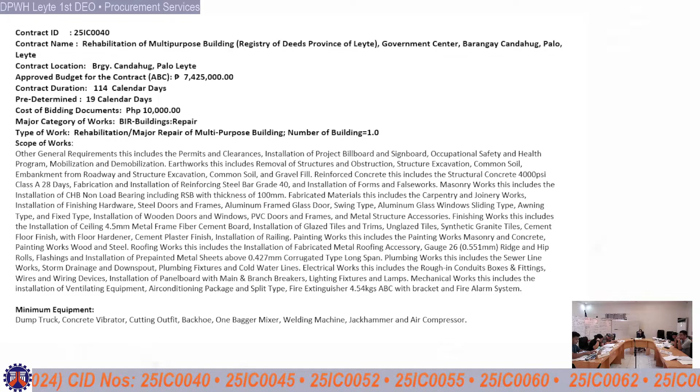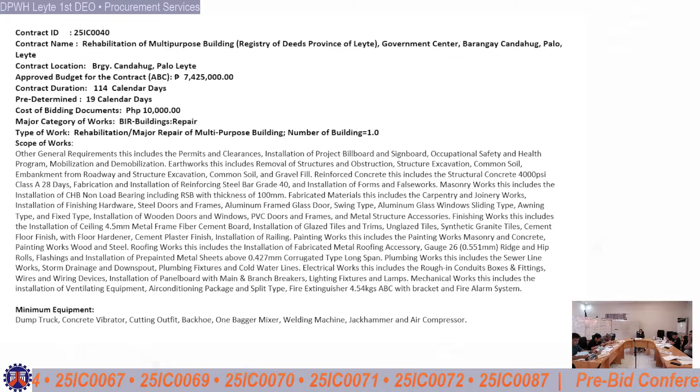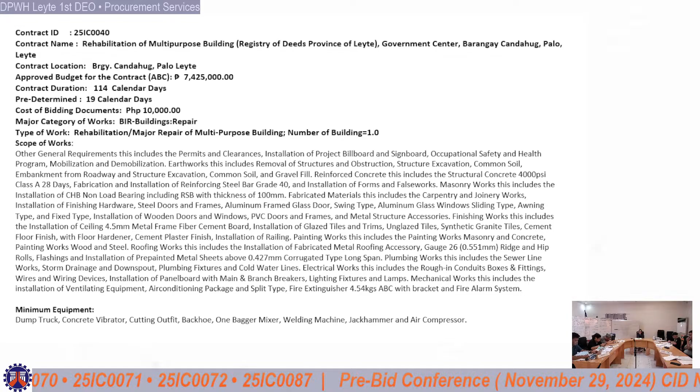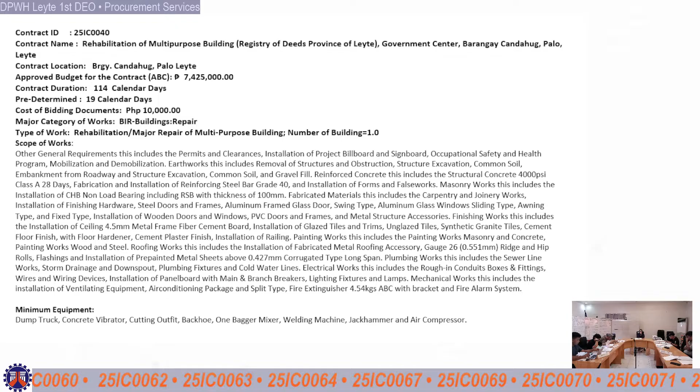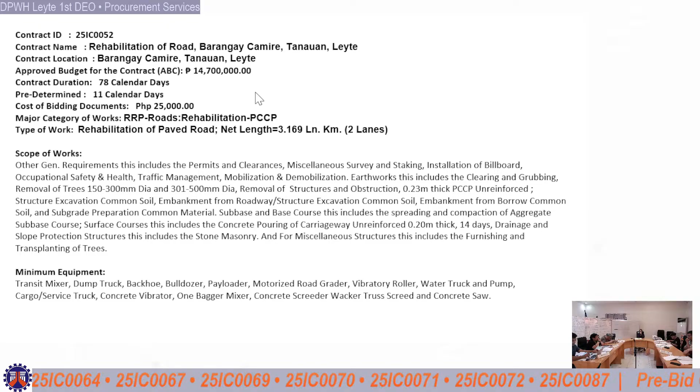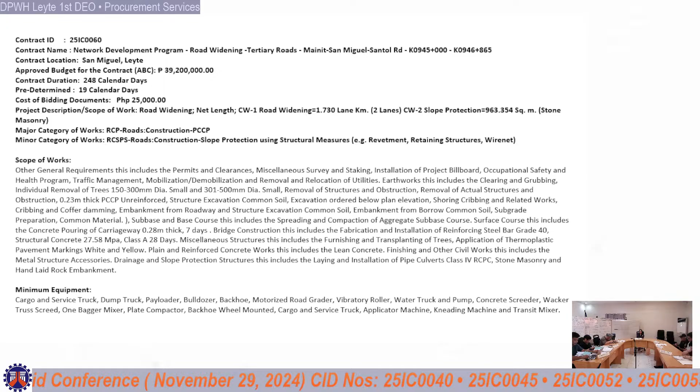And for earthworks, this includes the clearing and grubbing, individual removal of trees 150 to 300 mm diameter, and 301 to 500 mm diameter small. Removal of structures and obstruction, removal of actual structures and obstruction, 0.23 meters thickness, PCCP unreinforced. Structure excavation, common soil, excavation ordered below plan elevation, shoring, cribbing and related works.

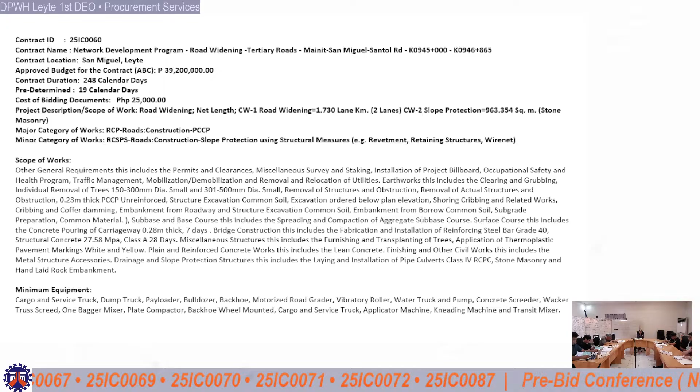Embankment from roadway and structure excavation, common soil, embankment from borrow, common soil, sub-grade preparation, common material. For sub-base and base course, this includes the spreading and compaction of aggregate sub-base course. For the surface course, this includes the concrete pouring of carriageway with 0.28 meters thickness, 7 days.

And for bridge construction, this includes the fabrication and installation of reinforcing steel bar grade 40, structural concrete 27.58 MPa, class A, 28 days. And for the miscellaneous structures, this includes the furnishing and transplanting of trees, application of thermoplastic pavement markings of white and yellow, plain and reinforced concrete works.

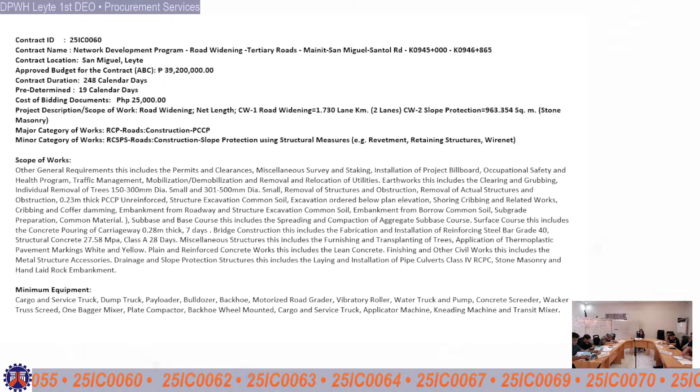This includes the lean concrete. And for the finishing and other civil works, this includes the metal structure accessories. And for the drainage and slope protection structures, this includes the laying and installation of pipe culverts, class 4 RCPC, stone masonry, and hand laid rock embankment.

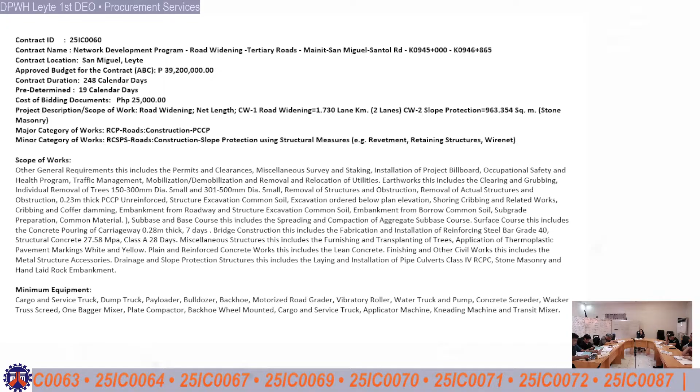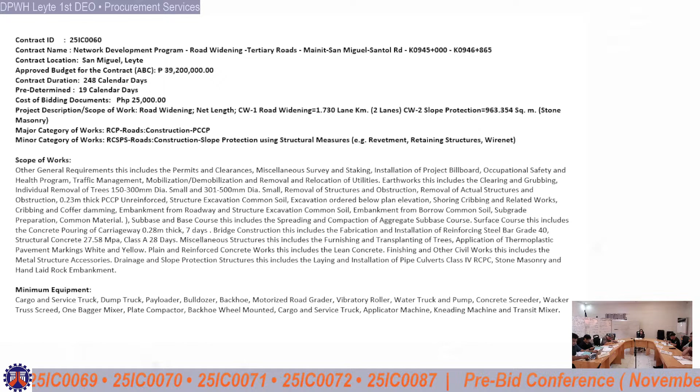And for the minimum equipment: cargo and service truck, dump truck, payloader, bulldozer, backhoe, motorized road grader, vibratory roller, water truck and pump, concrete screeder, wacker truss screed, one bagger mixer, plate compactor, backhoe wheel mounted, cargo and service truck, applicator machine, kneading machine, and transit mixer.

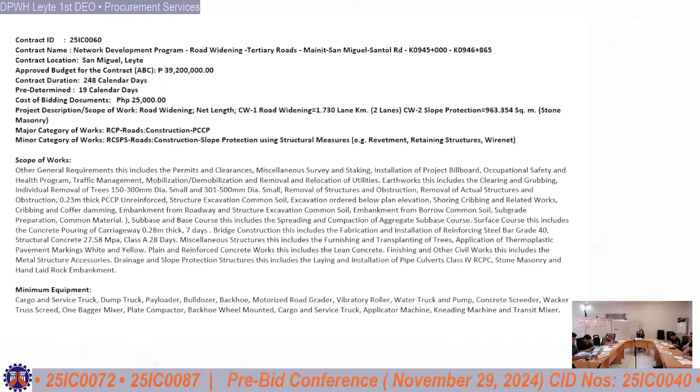For the next project is 25IC0062. The contract name is the Network Development Program, Road Widening, Tertiary Roads, Tanauan-Dagami Road along station units, K0928 plus 930 to K0929 plus 012. The contract location is in Tanauan, Leyte.

And the approved budget for the contract is 6,860,000 pesos. The contract duration is 100 calendar days and 7 predetermined calendar days. The cost of bidding documents is 10,000 pesos.

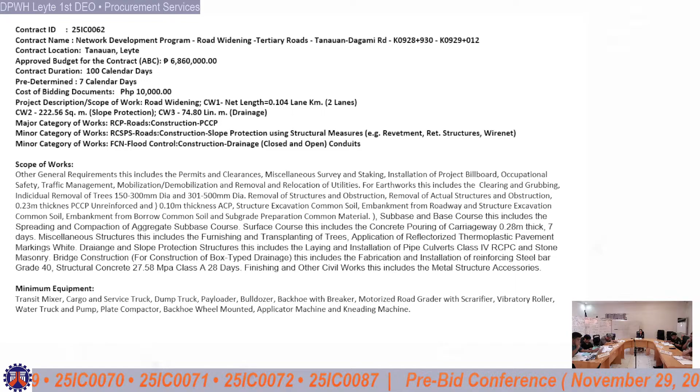The type of works, this has also three civil works. For civil works 1, this is road widening with a total length of 0.104 lane kilometer, 2 lanes. For the second civil works, slope protection, this has a total area of 222.56 square meter. And for the drainage, civil works 3, this has a total length of 74.80 linear meters.

For the major categories of works, RCP roads construction PCCP for civil works 1. For civil works 2, this is in minor category of works, RCSPS, roads construction slope protection using structural measures, for example, revetment, retaining structures, and wire net. And for the third category of works is FCN, flood control, construction, drainage, closed and open conduits.

The scope of works, other general requirements, this includes the permits and clearances, miscellaneous survey and staking, installation of project billboard, occupational safety and health program, traffic management, mobilization and demobilization, removal and relocation of utilities.

For earthworks, it includes the clearing and grubbing, individual removal of trees 150 to 300 mm diameter and 301 to 500 mm diameter. Removal of structures and obstruction, removal of actual structures and obstruction with 0.23 meters thickness, PCCP unreinforced, and also 0.10 meters thickness, ACP.

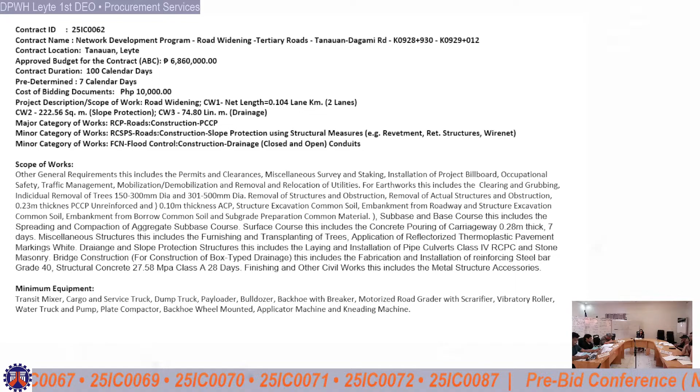For the surface course, this includes the pouring of carriageway with 0.28 meters thickness, 7 days. For miscellaneous structures, this includes the furnishing and transplanting of trees, and application of reflectorized thermoplastic pavement markings.

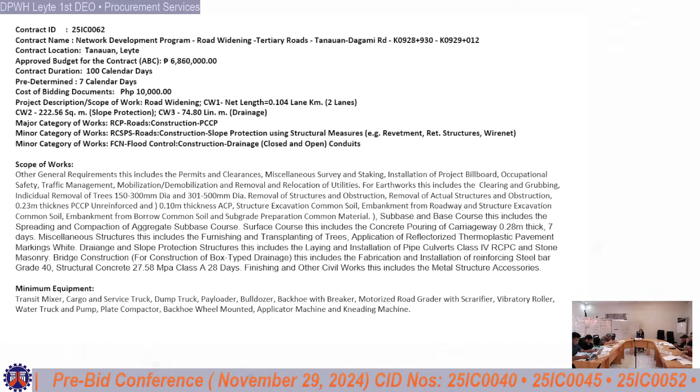For drainage and slope protection structures, this includes the laying and installation of pipe culverts, class 4 RCPC, and stone masonry. For the bridge construction, for construction of box type drainage, this includes the fabrication and installation of reinforcing steel bar, grade 40, structural concrete 27.58 megapascal class A 28 days.

For finishing and other civil works, this includes the metal structure accessories. For the minimum equipment: transit mixer, cargo and service truck, dump truck, payloader, bulldozer, backhoe breaker, motorized road grader with scarifier, vibratory roller, water truck and pump, plate compactor, backhoe mounted, applicator machine, and kneading machine.

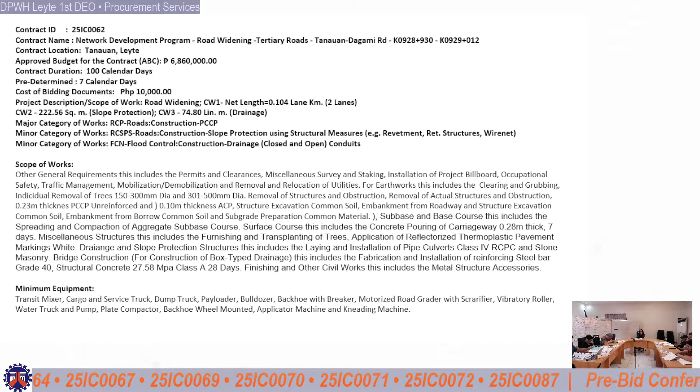For the next project, it's going to be IC 0063. The contract name is Network Development Program, Road Widening, Tertiary Roads, Tigbao to Pulak, Santa Fe Road, along station limits, K0910 plus 920 to K0911 plus 136, and K0911 plus 168 to K0912 plus 367. The contract location is in Santa Fe, Leyte.

The approved budget for the contract is 49 million pesos. The contract duration is 219 calendar days and 22 predetermined calendar days. The cost of bidding documents is 25,000 pesos, and the type of work has 2 civil works.

For civil works 1, it is road widening with a total length of 2.830 lane kilometer, 2 lanes. For civil works 2, for slope protection with a total area of 1,387.736 square meter, stone masonry.

For the major categories of works: RCP, roads construction, PCCP. For the minor category of works: RCSPS, roads construction, slope protection, using structural measures, revetment, retaining structures, and wire net. For the scope of works, for other general requirements, this includes the permits and clearances, miscellaneous survey and staking, installation of project billboard, occupational safety and health program, traffic management, mobilization and demobilization, removal and relocation of utilities.

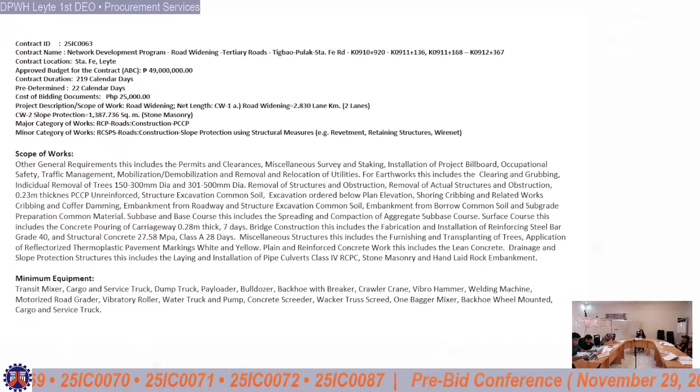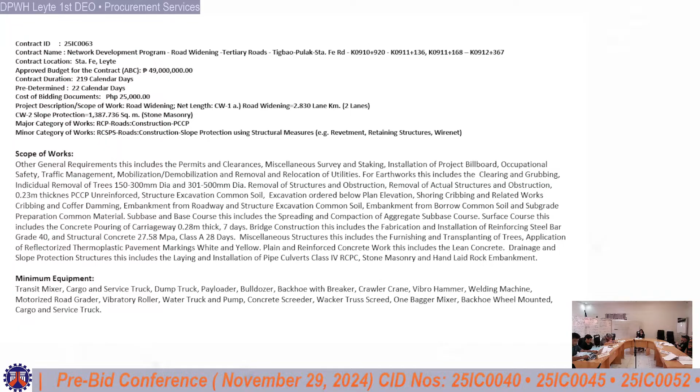For the minimum equipment: transit mixer, cargo and service truck, dump truck, payloader, bulldozer, backhoe with breaker, crawler crane, vibro hammer, welding machine, motorized road grader, vibratory roller, water truck and pump, concrete screeder, wacker truss screed, one bagger mixer, backhoe wheel mounted, cargo and service truck.

For the next project is 25 IC 0064, construction of one unit, two-story multi-purpose building, senior citizen center, and other related works, government center, Palo, Leyte.

The approved budget for the contract is 6,930,000 pesos. The contract duration is 104 calendar days and 26 predetermined calendar days. The cost of bidding documents is 10,000 pesos. The type of work is construction of multipurpose building.

The major category of works is BIPW2 PLC, buildings construction without piles, low-rise concrete frame, 1 to 5 stories. For the scope of works, for the other general requirements, this includes the permits and clearances, installation of project billboard and signboard, occupational safety and health program, mobilization and demobilization.

For the earthworks, this includes the clearing and grubbing, structure excavation, common soil, embankment from roadway and structure excavation, common soil, embankment from borrow, common soil, and gravel fill.

For the reinforced concrete, this includes the structural concrete 4,000 PSI class A 28 days, lean concrete, fabrication and installation of reinforcing steel bar grade 40, and installation of form works and post works.

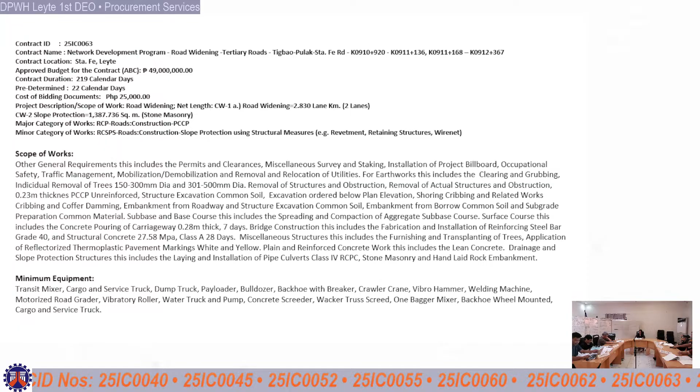For the roofing works, this includes the installation of fabricated metal roofing accessory gauge 26 with 0.551 mm, flashings, and the installation of prepainted metal sheets above 0.427 mm corrugated type long span.

For metal structure accessories, turnbuckle, bolts and rods, sag rods, cross bracing, steel plate, structural steel trusses, and purlins.

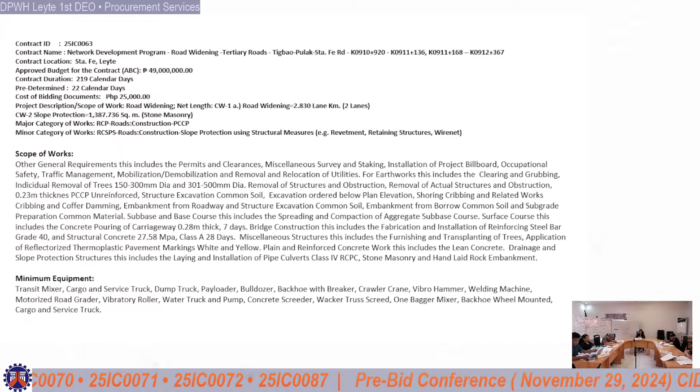For plumbing works, this includes the sewer line works, storm drainage and downspout, plumbing fixtures, cold water lines, and plumbing works. For electrical works, this includes the routing of conduits, boxes, and fittings, wires and wiring devices, installation of panel board with main and branch breakers, lighting fixtures and lamps.

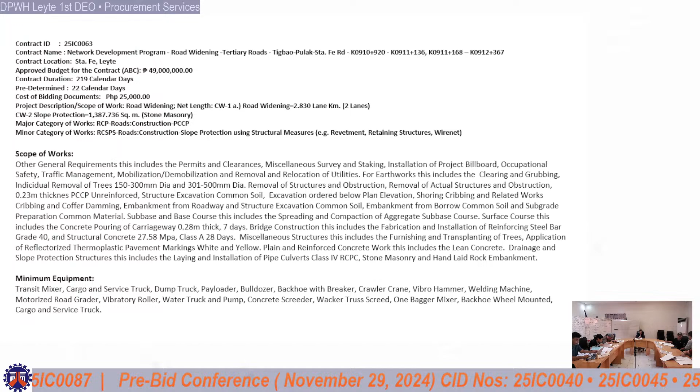For mechanical works, this includes the installation of fire extinguisher, 4.54 kilograms ABC bracket, and a fire alarm system. For the minimum equipment: dump truck, concrete vibrator, cutting outfit, backhoe, plate compactor, concrete one bagger mixer, welding machine, payloader, and bulldozer. The next project is 25 IC 0067, rehabilitation of multipurpose building, Barangay Victoria, Santa Clara, Leyte.

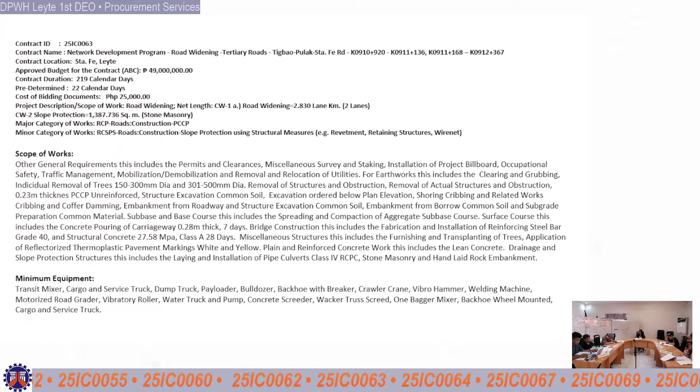The approved budget for the contract is 5,940,000 pesos. The contract duration is 152 calendar days and 26 predetermined calendar days, and the cost of bidding documents is 10,000 pesos. The type of work is rehabilitation and major repair of multipurpose building. The major categories of works is VIR, buildings repair.

For the scope of works, for other general requirements, this includes the permits and clearances, installation of project billboard and signboard, occupational safety and health program, mobilization and demobilization. For the earthworks, this includes the removal of structures and obstruction, structure excavation common soil, embankment from roadway and structure excavation, common soil, embankment from borrow, common soil, and gravel fill.

For reinforced concrete, this includes the structural concrete, 4,000 psi at class A, 28 days. Fabrication and installation of reinforcing steel bar, grade 40, and installation of forms and postworks. For masonry work, this includes the installation of CHB non-load bearing, including RSB with thickness of 100 mm and 150 mm.

Finishing materials, this includes the carpentry and joinery works, installation of finishing hardware, aluminum frame glass doors sliding type, aluminum glass windows sliding type, awning type, and fixed type, door flush, door wood panel, PVC doors and frames, and metal structure accessories.

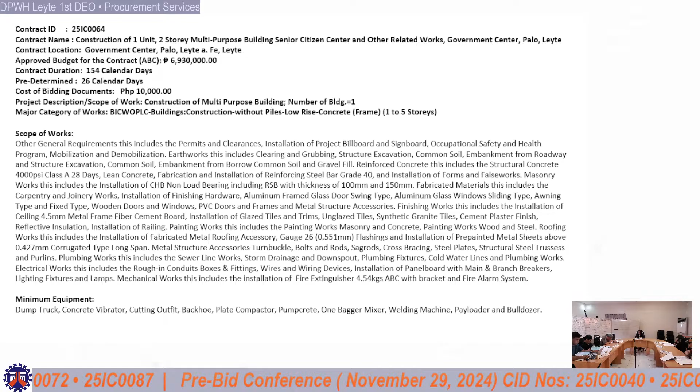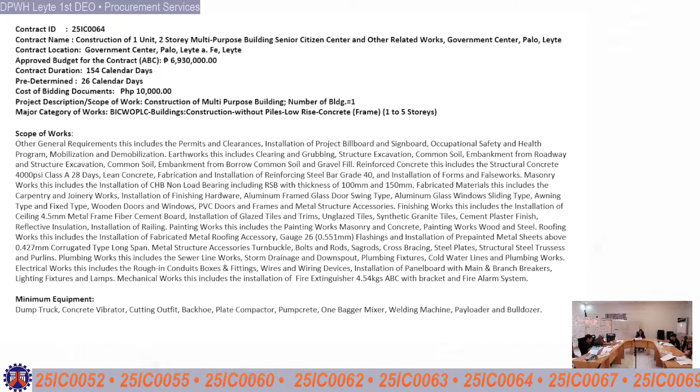This has also two civil works. For civil works 1, the road widening with a total length of 0.029 lane kilometer, 2 lanes. For civil works 2, this is for the construction of drainage with a total length of 8.70 linear meters. For the major categories of works, RCP roads construction PC2, and for the minor category of works is FCF flood control construction drainage closed and open conduits.

For the scope of works, for other general requirements, this includes the installation of project billboard, occupational safety and health program, traffic management,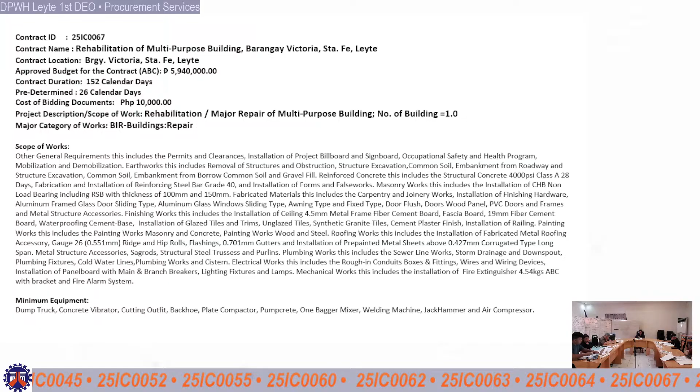For the next project is 25IC0069, Network Development Program, road widening, primary roads, Palo-Carigara-Ormoc Road, along station limits K0921 plus 722 to K0921 plus 743. The contract location is in Barangay Tibak, Santa Fe, Leyte.

The approved budget for the contract is 1 million pesos. The contract duration is 11 calendar days and 1 predetermined calendar days. The cost of bidding documents is 1,000 pesos.

The type of work, civil works 1, with road widening, 0.029 lane kilometer, 2 lanes. Civil works 2, 8.70 linear meter for drainage.

For the major categories of works, RCP, roads construction PCCP, and for the minor categories of works, FCN, flood control construction drainage closed and open conduits.

For the next project is 25 IC 0070, rehabilitation of multi-purpose building, Barangay Baculanad, Santa Fe, Leyte. The approved budget for the contract is 5,940,000 pesos.

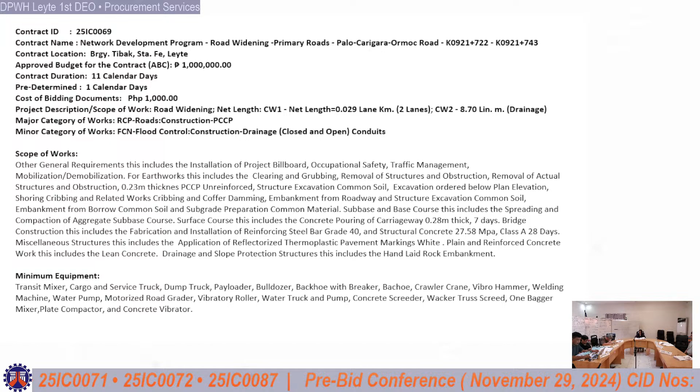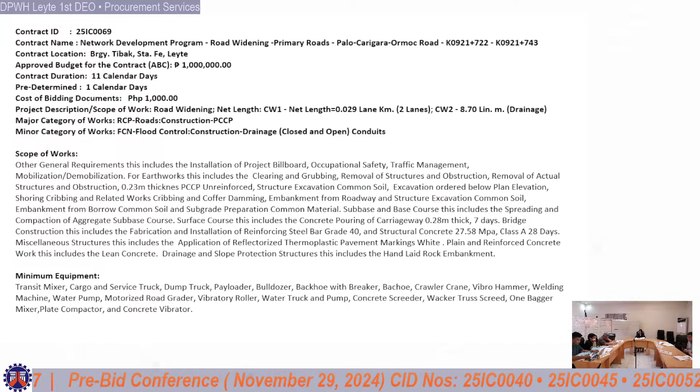Fabricated materials, this includes the carpentry and joinery works, installation of finishing hardware, aluminum frame glass doors, swing type, aluminum glass windows, sliding type, awning type, and fixed type. Frames, jambs, sills, heads, transoms, and mullions, doors wood panel, PVC doors and frames, and metal structure accessories.

For the finishing works, this includes the installation of ceiling, 4.5 mm metal frame fiber cement board, fascia board, 19 mm fiber cement board, waterproofing cement-base, installation of glazed tiles and trims, unglazed tiles, synthetic granite tiles, cement plaster finish, reflective insulation, and installation of railing.

For the painting works, this includes the painting works of masonry and concrete, painting works of wood and steel.

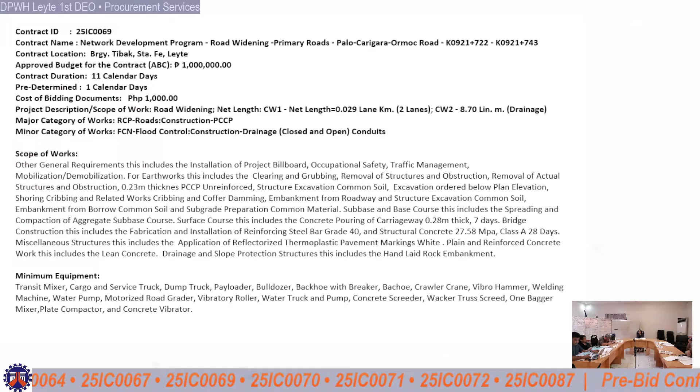For the roofing works, this includes the installation of fabricated metal roofing accessory, gauge 26, for the ridge and hip rolls, for the flashings, for the gutters, 0.701 mm, and installation of pre-painted metal sheets above 0.427 mm corrugated type long span.

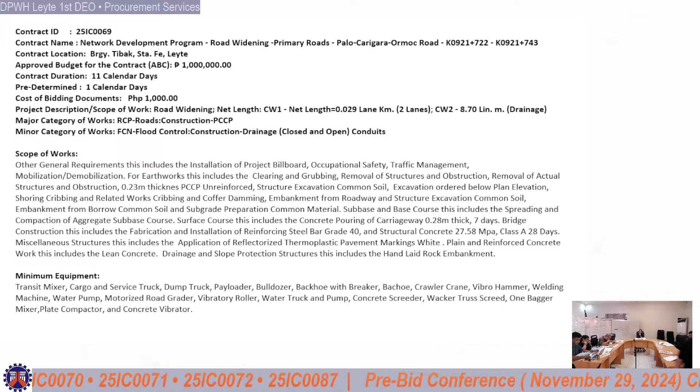For metal structure accessories, sagrods, turnbuckle, bolts and rods, cross bracing, and steel plates. For structural trusses and purlins.

For plumbing works, this includes the sewer line works, storm drainage and downspout, plumbing fixtures, cold water lines, and cistern. For electrical works, this includes the rough-in of conduits, boxes, and fittings, wires and wiring devices, installation of panel board with main and branch breakers, lighting fixtures and lamps.

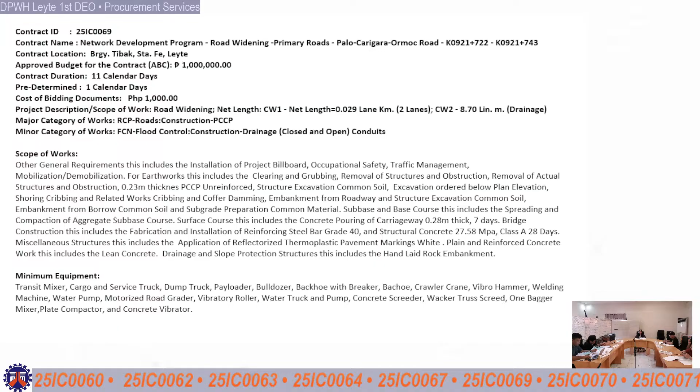For mechanical works, this includes the installation of air conditioning package split type, fire extinguisher 4.54 kilograms ABC with bracket, and a fire alarm system. For the minimum equipment, dump truck, concrete vibrator, cutting outfit, backhoe, plate compactor, pumpcrete, one bagger mixer, welding machine, jackhammer, air compressor, and cargo and service truck.

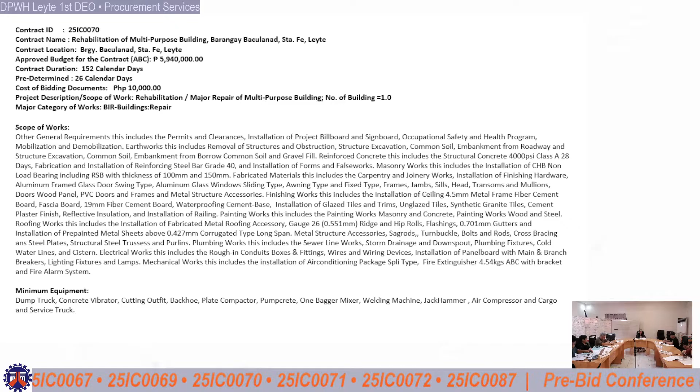The type of work is construction of concrete road with a total length of 4 lane kilometer, 2 lanes. The major categories of works are RCP, roads construction, PCCP.

For the scope of works, other general requirements include miscellaneous survey and staking, installation of project billboard and design work, occupational safety and health program, traffic management, mobilization and demobilization, permanent monuments and markers, permits and clearances.

For earthworks, this includes clearing and grubbing, removal of trees 150 to 300 mm diameter, removal of structures and obstruction, unsuitable excavation, structure excavation common soil, excavation ordered below plan elevation, embankment from roadway and structure excavation common soil, and embankment from borrowed common soil.

Subgrade preparation, common material. For the subbase and base course, this includes spreading and compaction of aggregate subbase course. For the surface course, this includes concrete pouring of carriageway unreinforced, 0.28 meters thickness, 7 days.

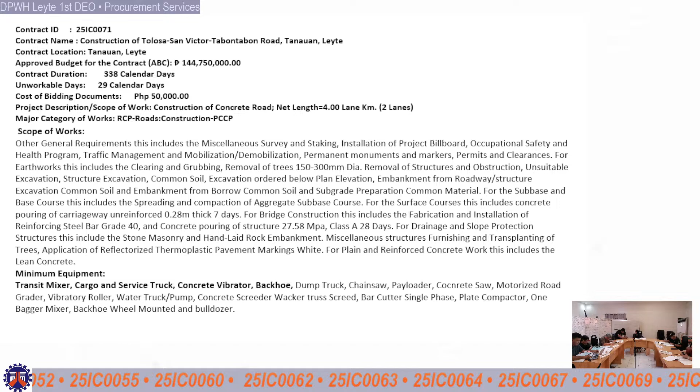For the miscellaneous structures, furnishing and transplanting trees, application of reflectorized thermoplastic pavement markings white. For plain and reinforced concrete works, this includes lean concrete.

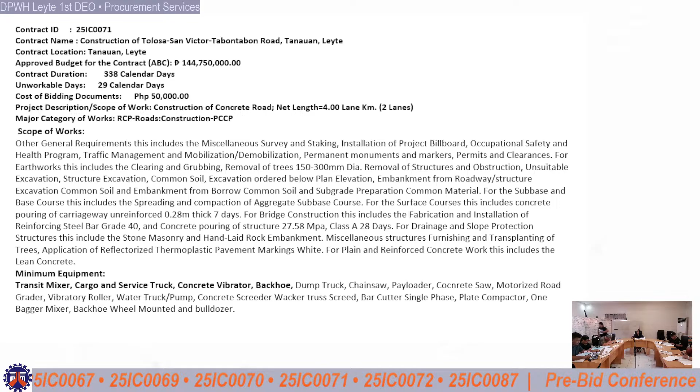For the minimum equipment: transit mixer, cargo and service truck, concrete vibrator, backhoe, dump truck, chainsaw, payloader, concrete saw, motorized road grader, vibratory roller, water truck and pump, concrete screeder wacker truss screed, bar cutter, single phase, plate compactor, one bagger mixer, backhoe wheel mounted, and bulldozer.

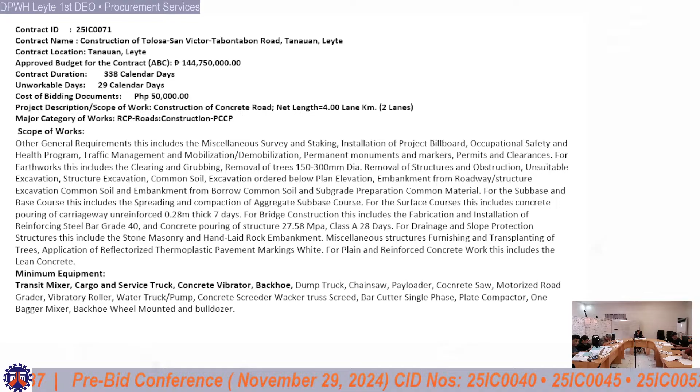For the next project, 25IC0072, construction of multi-purpose building 1, Alang-Alang, Leyte. The approved budget for the contract is 49,500,000 pesos. The contract duration is 233 calendar days and 39 predetermined calendar days. The cost of bidding documents is 25,000 pesos.

The type of work is construction of multi-purpose building. The major categories of work is BICWOPLC buildings construction without piles, low-rise concrete frame, 1 to 5 stories.

For the scope of work, other general requirements include permits and clearances, installation of project billboard and signboard, occupational safety and health program, mobilization and demobilization.

For the earthworks, this includes removal of structures and obstruction, structure excavation common soil, embankment from roadway and structure excavation common soil, embankment from borrow common soil, and gravel fill.

For the reinforced concrete, this includes structural concrete class A, 14 days, lean concrete, fabrication and installation of reinforced steel bar grade 40 and grade 60, and installation of forms and falsework.

For masonry works, this includes installation of CHB non-load bearing, including RSB, with thickness of 100 mm and 150 mm. For fabricated materials, this includes carpentry and joinery works, installation of finishing hardware, steel doors and frames.

Aluminum frame glass doors, swing type, aluminum glass windows, fixed type, frames, jambs, sills, heads, transoms and mullions, wood panel doors, metal structure accessories. For finishing works, this includes installation of ceiling, 4.5 mm metal frame fiber cement board.

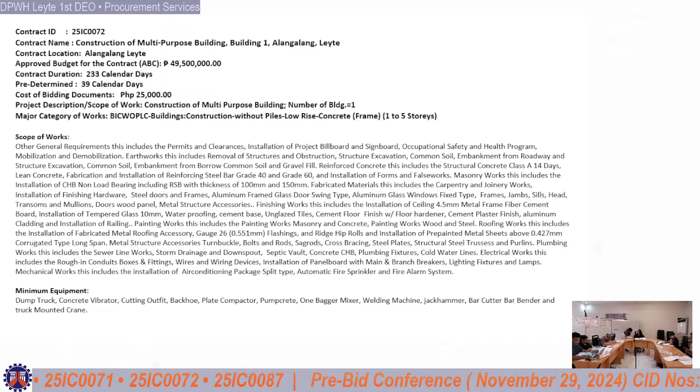For the painting works, this includes painting works of masonry and concrete, painting works of wood and steel. For the roofing works, this includes installation of fabricated metal roofing accessory, gauge 26, flashings and ridge hip rolls, and installation of pre-painted metal sheets above 0.427 mm corrugated type long span.

For metal structure accessories: turnbuckle, bolts and nuts, sag rods, cross bracing, steel plates, structural steel trusses, and purlins.

For the plumbing works, this includes sewer line works, storm drainage and downspout, septic vault, concrete CHB, plumbing fixtures, cold water lines. For electrical works, this includes roughing-in of conduits, boxes and fittings, wiring devices, installation of panel board with main and branch breakers, lighting fixtures and lamps.

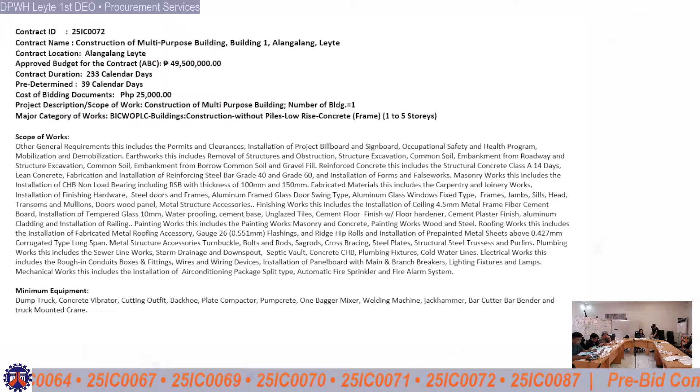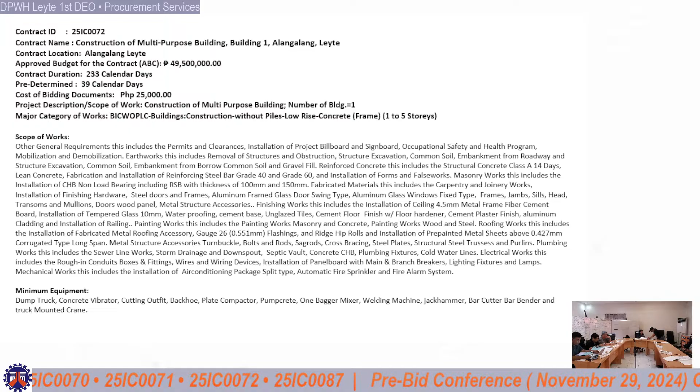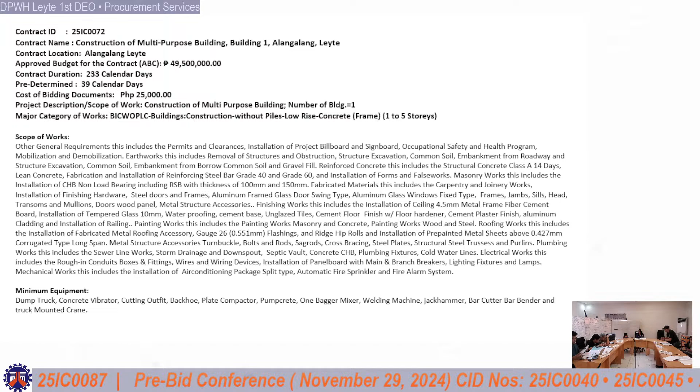For mechanical works, this includes installation of air conditioning package, split type, automatic fire sprinkler, and fire alarm system. For the minimum equipment: dump truck, concrete vibrator, cutting outfit, backhoe, plate compactor, pumpcrete, one bagger mixer, welding machine, jackhammer, bar cutter, bar bender, and truck mounted crane.

For the next project, IC 0087: construction of a multi-purpose building covered for Barangay Kabatsan, Alang-Alang, Leyte. The approved budget for the contract is 9,900,000 pesos. The contract duration is 159 calendar days, with 27 pre-term calendar days, and the cost of bidding documents is 10,000 pesos.

The type of work is construction of a multi-purpose building. The major category of work is BICWOPLC, buildings construction without piles, low-rise concrete frame, 1 to 5 stories.

For the scope of works, this includes other general requirements: permits and clearances, project billboard and signboard, occupational safety and health program, and mobilization and demobilization.

For earthworks, this includes individual removal of trees 150 to 200 mm diameter, structure excavation of common soil, embankment from roadway and structure excavation common soil, embankment from borrow common soil, and gravel pit.

For reinforced concrete, this includes structural concrete Class A, reinforcing steel deformed Grade 40, and formworks and falseworks.

For masonry works, this includes the installation of CHB, non-load bearing, including RSB 150 mm.

For fabricated materials, this includes carpentry and joinery works, finishing hardware, aluminum glass windows folding type, frames, jambs, sills, heads, transoms and mullions, doors, wood panel, and metal structure accessories.